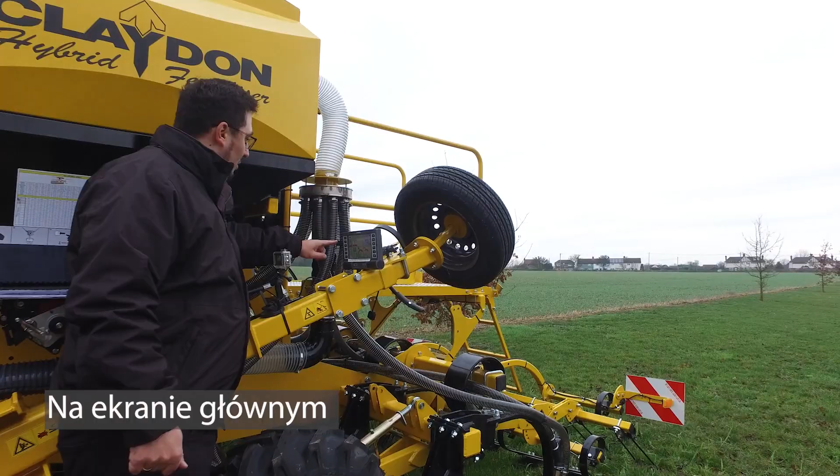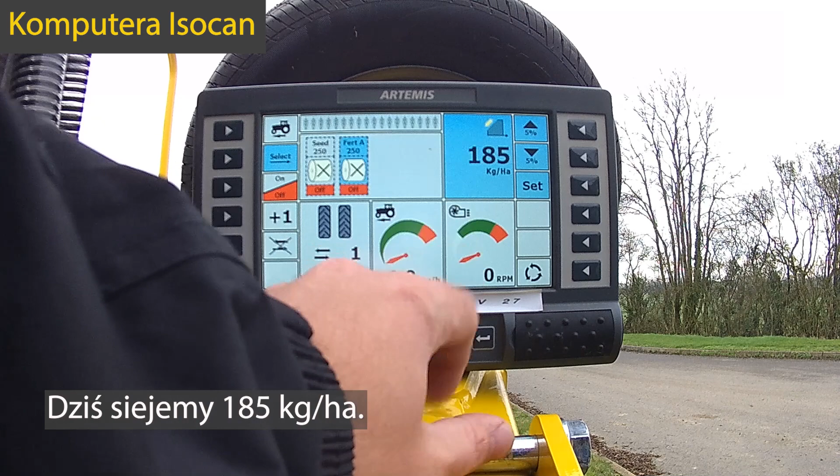The calibration process begins with inputting your seed rate into the ISOCAN task controller. You need to find your main farming screen, and on the top right corner of the screen you will set your required seed rate. We will be drilling 185 kilograms per hectare, and this will give you a recommended maximum forward speed. You need to press OK, and now you can start your calibration process.

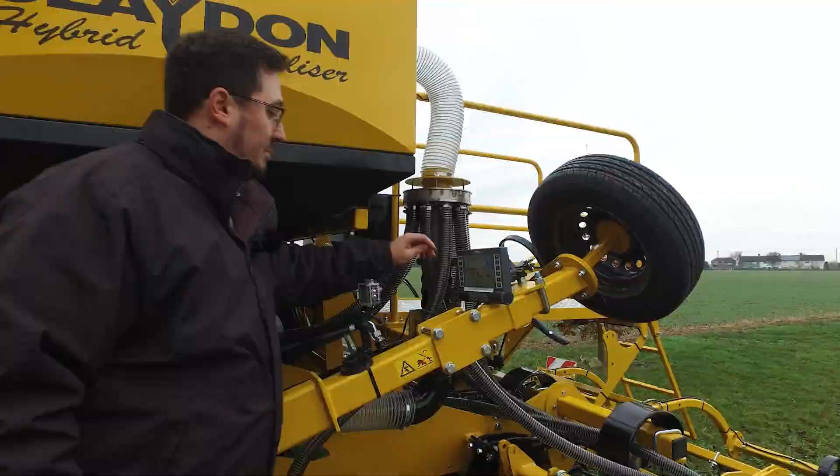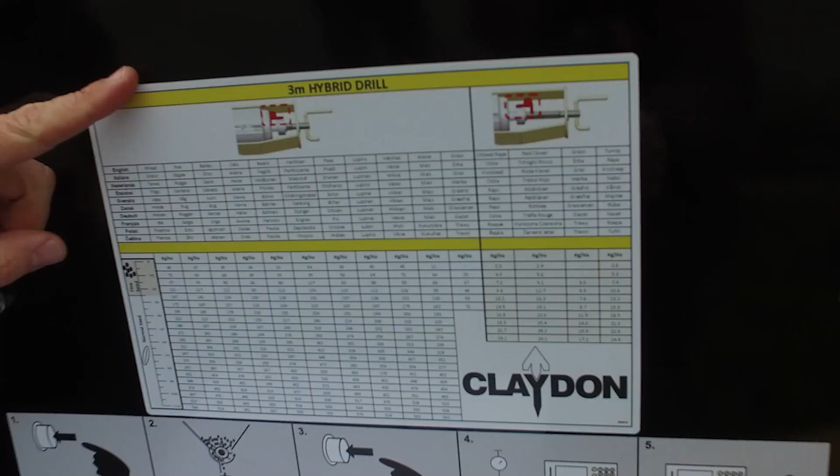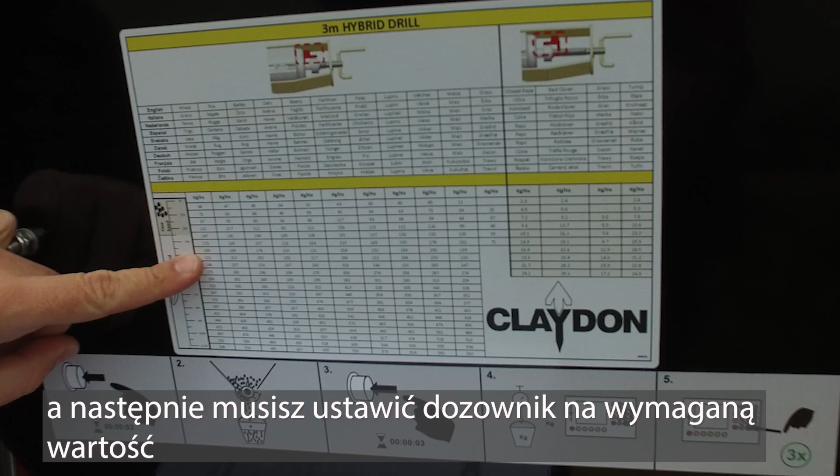After setting the required seed rate in the ISOBUS terminal, find the required product on the chart. On the decal located on the side of every single hopper, you will need to find the product that you're drilling, find the seed rate that you're drilling, and adjust your metering unit to the required setting. This chart is also available in your operator's book that comes with every single machine, and if you require a hard copy you need to contact your local dealer, or please visit our website and download it for free.

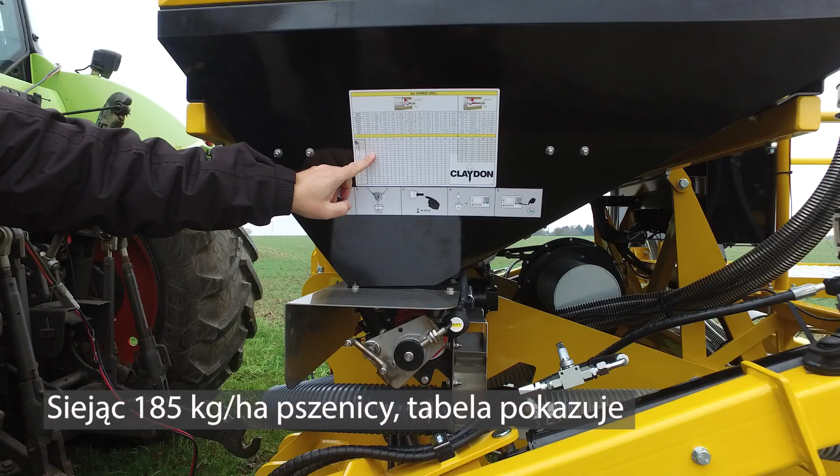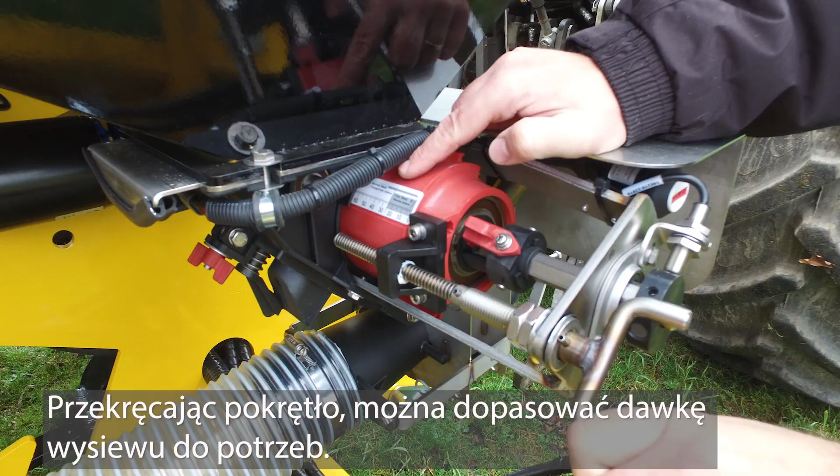So our table says to do 185 kilograms a hectare of wheat, you need to open your metering unit up to about 35 to 40 millimeters. The same scale is to be found on the side of your metering unit, and you will need to adjust it to match the required seed rate by turning this fork in or out.

Before you adjust the metering unit, it's very important to remember that the metering unit must be free of seeds, fully empty, because if it has got seeds in it, you can easily damage it, and unfortunately it's a very expensive replacement. To adjust it, you will need to move the fork in or out.

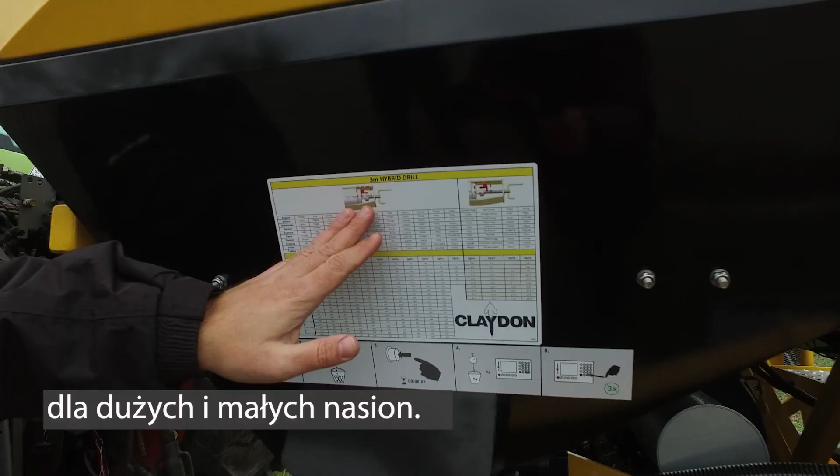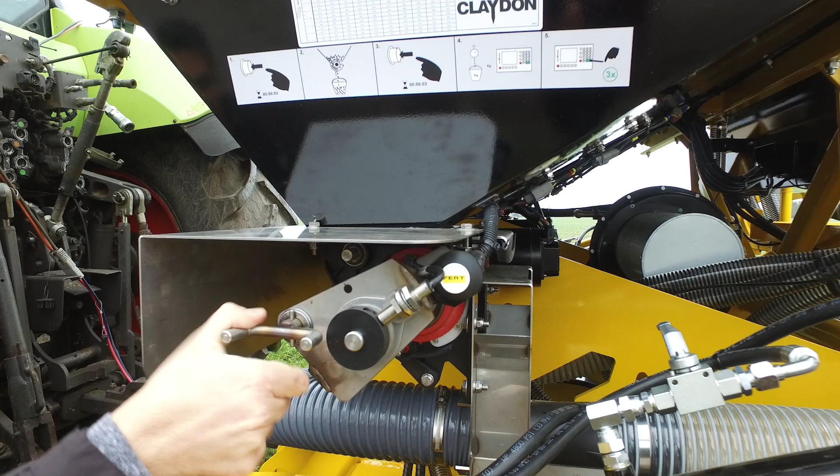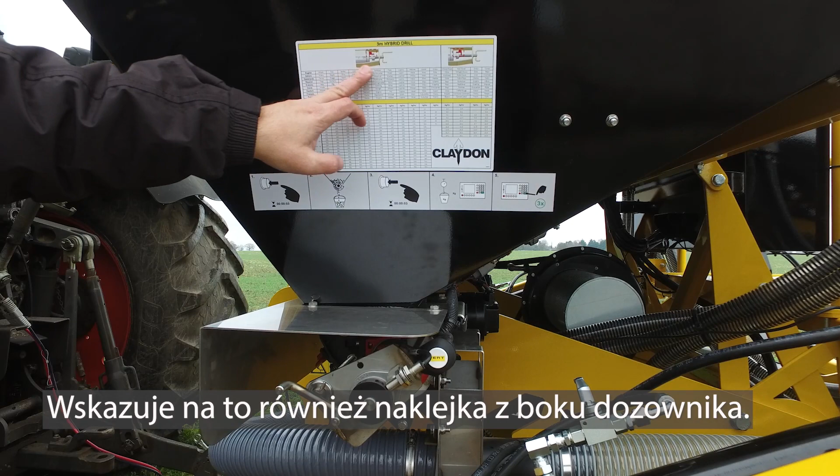We have two settings on the Claydon hybrid drills where you can adjust your metering unit between the large seed settings and the small seed settings. To change between large seeds and small seeds, you need to adjust your metering unit in all the way to 0 before you can change it. And you need to turn the small red arm on the inside to lock into the shaft. The decal on the side of the metering unit demonstrates this too: large seed settings, and the little red arm turned the opposite way around for small seeds.

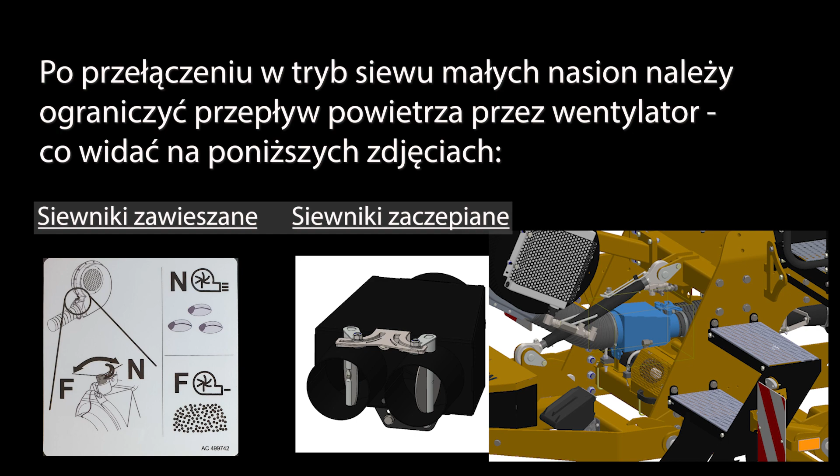It is very important that you always set your metering unit depth before you fill up your hopper with product, because you want the metering unit to be empty, as discussed previously, because you don't want to damage the metering unit by adjusting it when you have product inside.

Some of the hybrid units, like the seed and fert drill, will have a shut-off plate to overcome this. But the seed-only mounted machines do not have a shut-off plate. So as soon as you put product in the hopper, you have product in your metering unit and you cannot adjust this. The same sticker is also to be found in your operator's book, where you have a step-by-step guide on how to do your calibration properly.

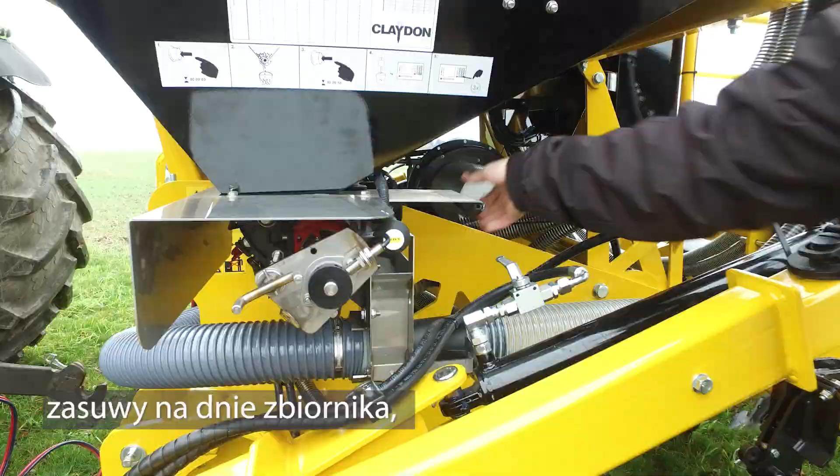After adjusting the metering unit depth, you will need to open the shutter plate on the bottom of the hopper to allow seed to flow into your metering unit. We now have seed in the metering unit, so the next step is to open the calibration hatch and fit the calibration tongs.

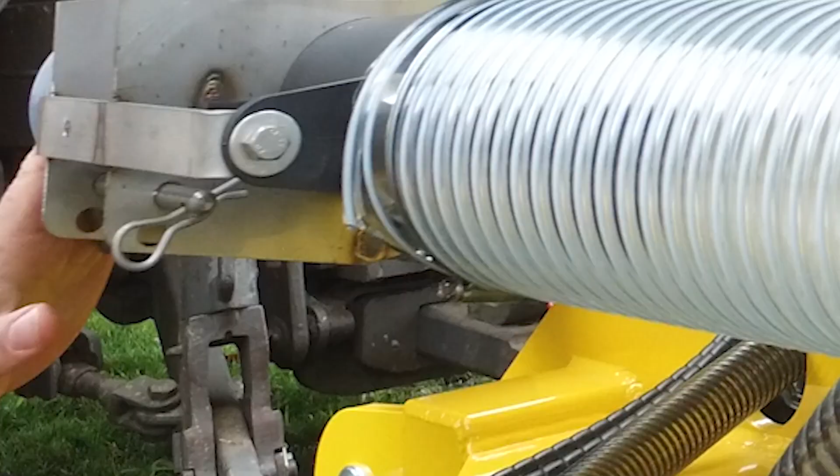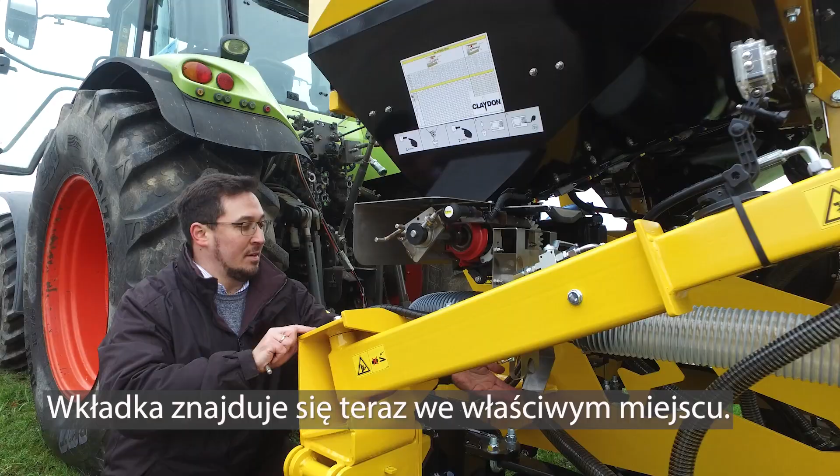The latch is secured by the secure pin, which is secured by the linch pin. Remove the linch pin and the secure pin, and the latch opens, and now you can fit your calibration tongs, which only fit one way. The calibration tongs are now fitted into the correct position, and we can now secure it with the secure pin and its linch pin.

Before you can run the first calibration test or bucket test, you need to purge your metering unit, which means you need to make it turn around one whole rotation to make sure that it's full of seed all the way from top to bottom, to make sure that your first calibration is accurate. To start the calibration process, you need to press and hold the calibration button for 3 seconds. This will activate the calibration in your ISOBUS terminal as well.

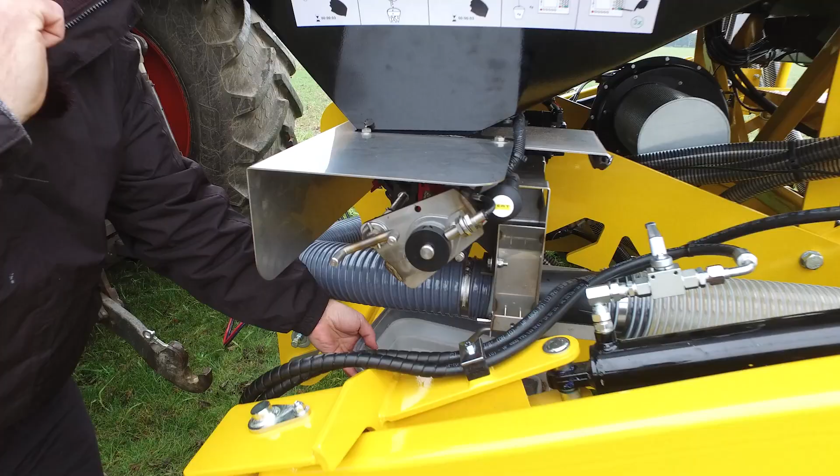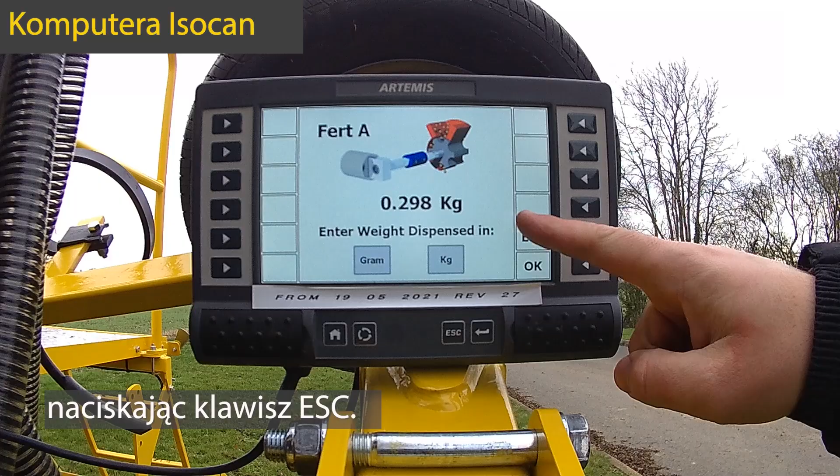It has done a whole revolution. So the next step is we need to cancel the calibration process or the purging process on the screen by pressing escape, and you need to empty your calibration bucket.

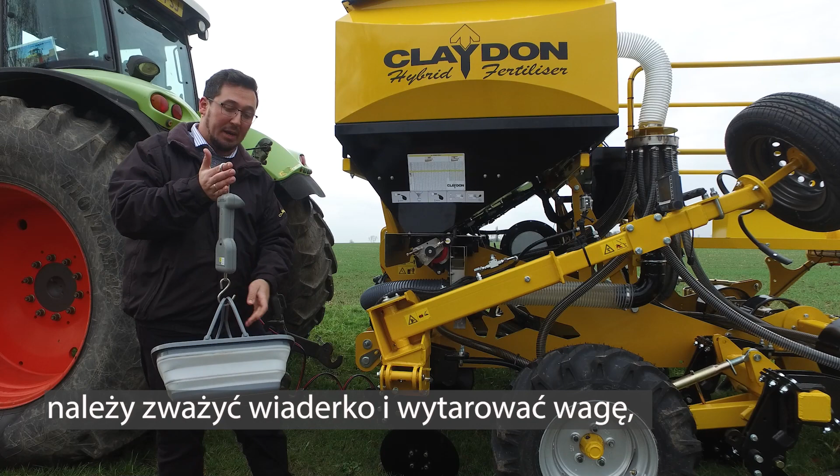Before you do your first calibration or bucket test, you will need to weigh your calibration basket or bag, and you will need to tare your scales to make sure that the weight of the basket will not interfere with the weight of your sample, and your calibration will be accurate. Don't worry if your scales turn off in the meantime whilst you do your calibration, it will still remember the weight of your basket.

Now you can start the first calibration process. Again, as before, you need to press and hold the calibration switch for 3 seconds, and that will start the first bucket test. When you do your calibration, you need to allow for a decent size of sample, at least 1.5 kilograms when you do medium-sized seeds like cereals.

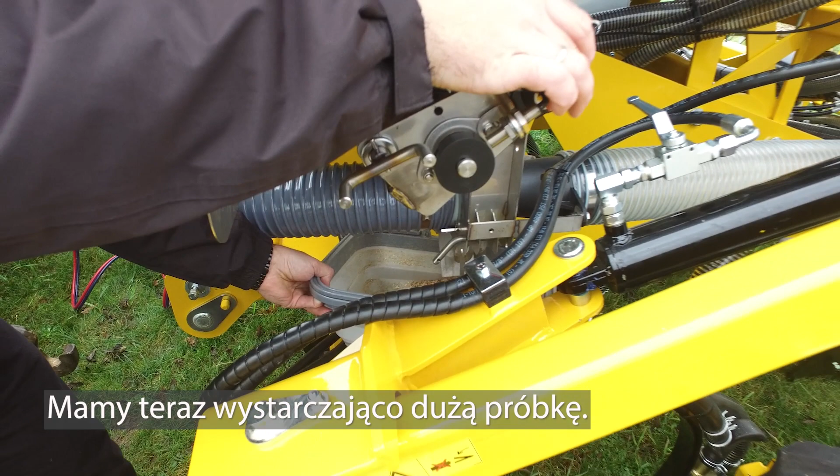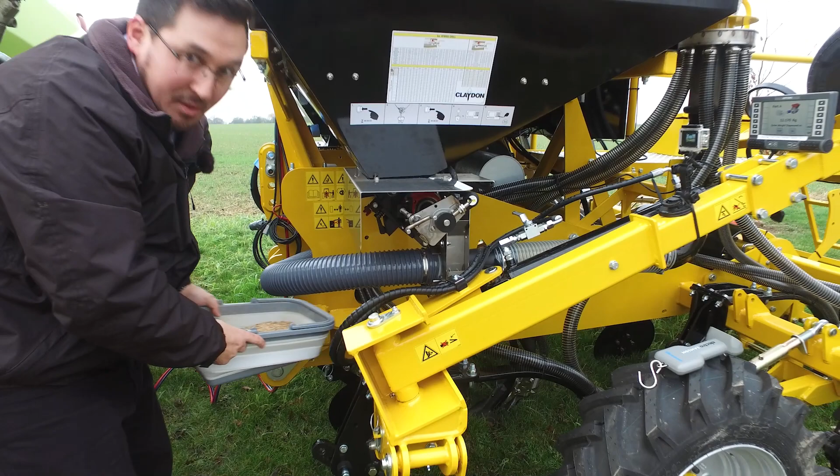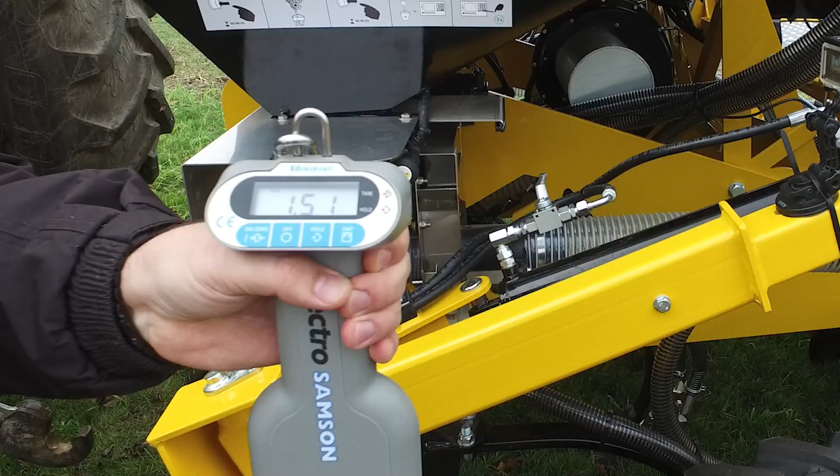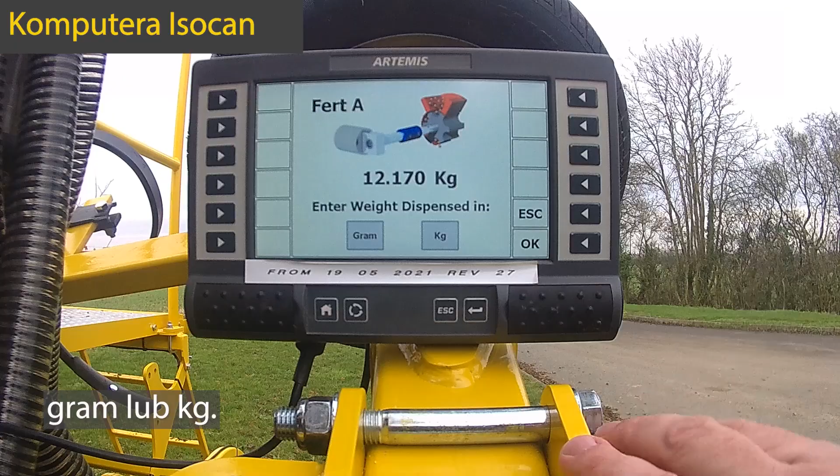We now have a good enough sample, so press and hold the calibration button for 3 seconds to stop the process. We now have a good enough sample in our basket, so we will now weigh the sample. Our scales show 1.51 kilograms. Now we need to input the weight. We need to choose the right measurement, grams or kilograms. We select kilograms and we input 1.51 kilograms

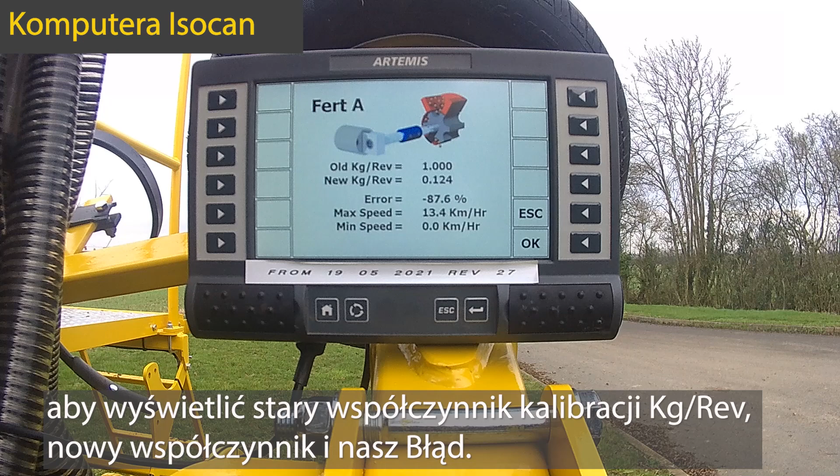and press OK. If we press OK again, that will show us the old kilograms per revolution calibration factor, the new one, and our error. Our error is 87.6%. We need to press OK to accept the error. We can now go and start the second calibration test.

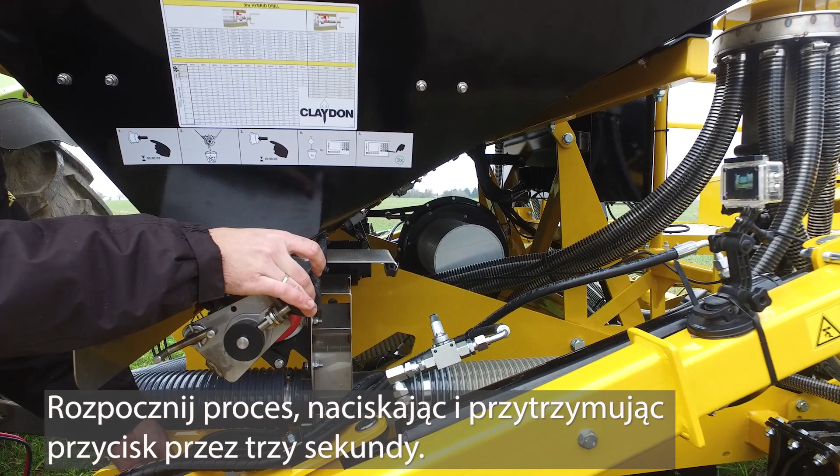You need to keep repeating the bucket test until you go below 3%. At least we recommend 3 times, but within 3 times, if you've done it well, you should be under 1% of error. Again, place your bucket underneath the calibration chute. Start the process by press and hold for 3 seconds. And we now can see that the metering unit has adjusted. It's flowing a lot quicker. We then press and hold again for 3 seconds.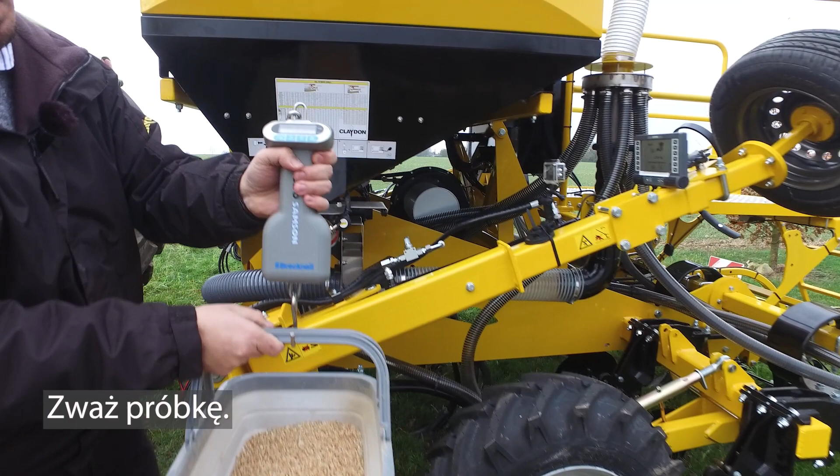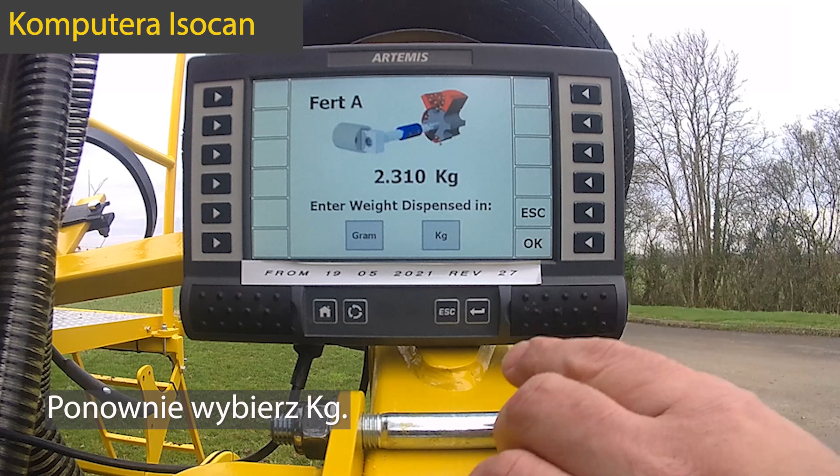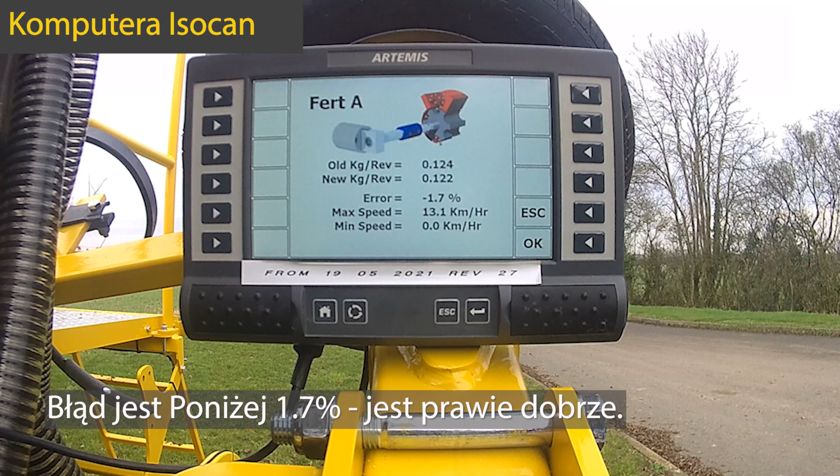Weigh our sample. It shows 2.31 kilograms, and this is the weight we need to input into the ISOCAN terminal. Again, on the screen we select kilograms, input 2.31 kilograms. Press OK, OK again. And we can now see that the error is below 1.7%, and that is almost good enough. We can press OK to accept the error, and we will do a third run to make sure that is definitely good.

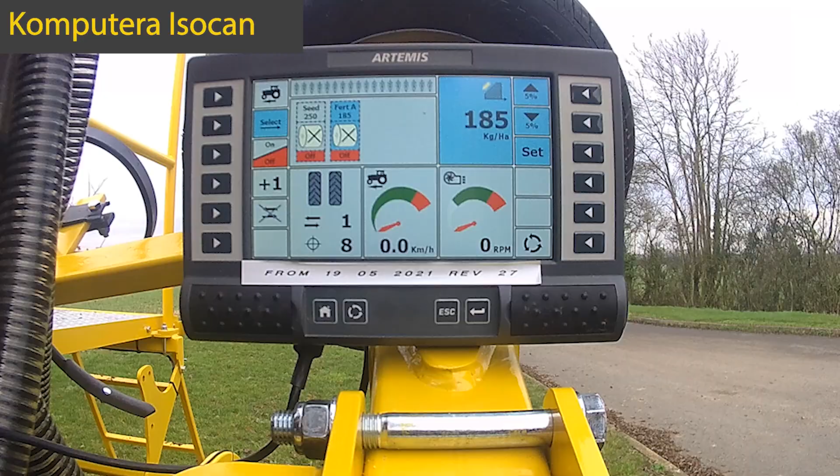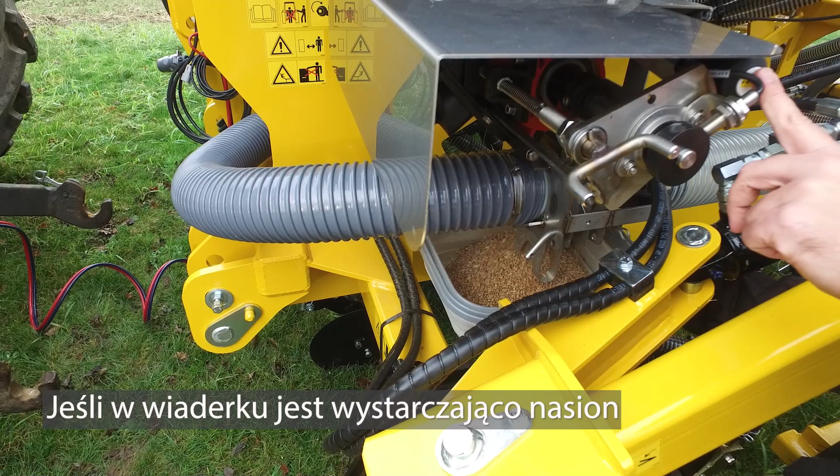The second calibration test brought us to a 1.7% error, which is already good enough to go and start our drilling. But we recommend that you always do 3 tests at least. So let's do a third run and see how we get on. Again, place your basket under the calibration chute, press and hold the calibration switch for 3 seconds. And when you have a nice heavy sample, press and hold the switch for 3 seconds again.

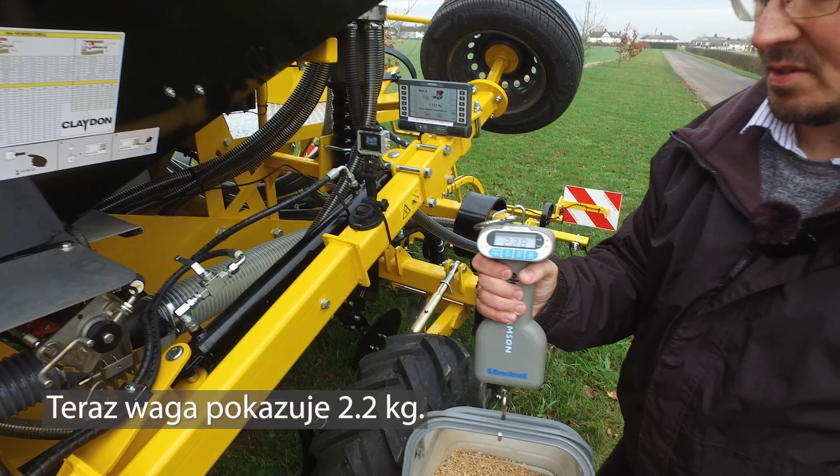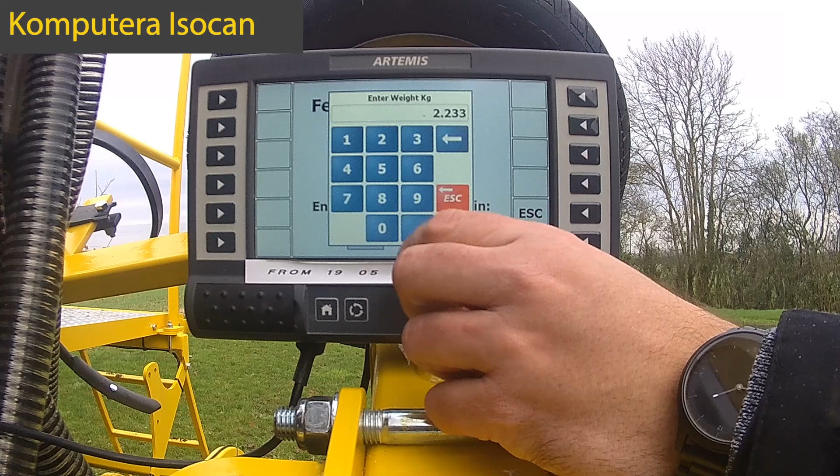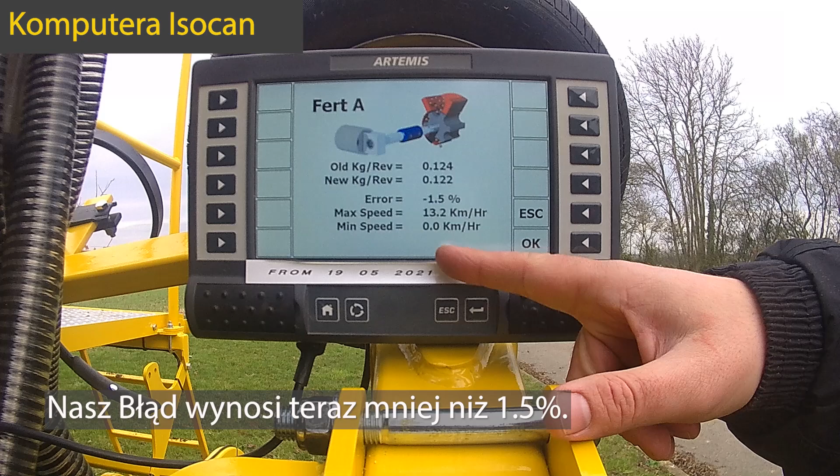Our calibration scales show 2.2 kilograms. Let's input that weight into our ISOCAN terminal. Again, select kilograms as before. 2.2 kilograms. Press OK again. So our error is now down to 1.5%. So we need to press OK to accept the error, to go back all the way to the main screen, and now we're ready to go and start drilling.

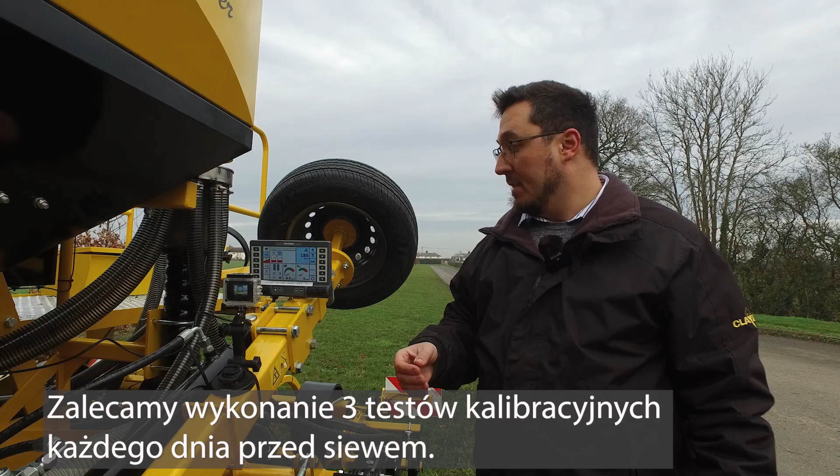We recommend that even if you drill the same product the following day, you need to do a calibration test every single morning at least 3 times, just to ensure that your applied seed rate will be correct and as accurate as possible. We have now completed the calibration process. As you can see, it's very simple, only takes a few minutes. But if you're unsure, check your operator's manual. If you have misplaced it, please visit our website and download a free copy, or contact your local dealer who will be able to supply a replacement one for you as well.